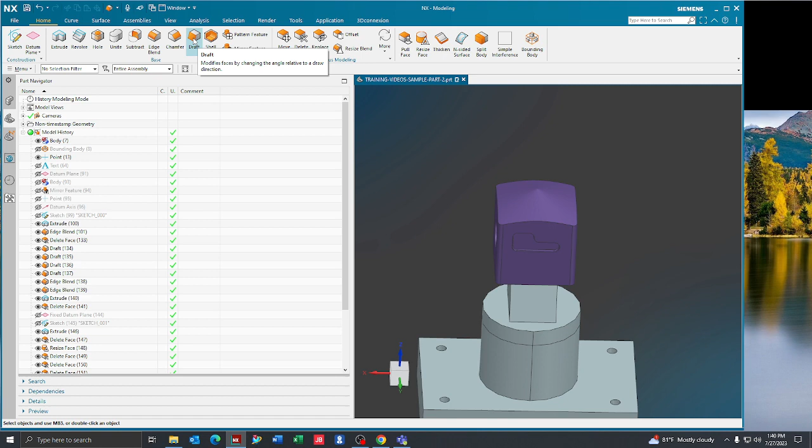Here's how to draft a face in NX. We'll go ahead and go to Application, Modeling, and on our Home tab, you'll see that there's a draft option. If you select this draft option, it's going to open up the draft dialog box.

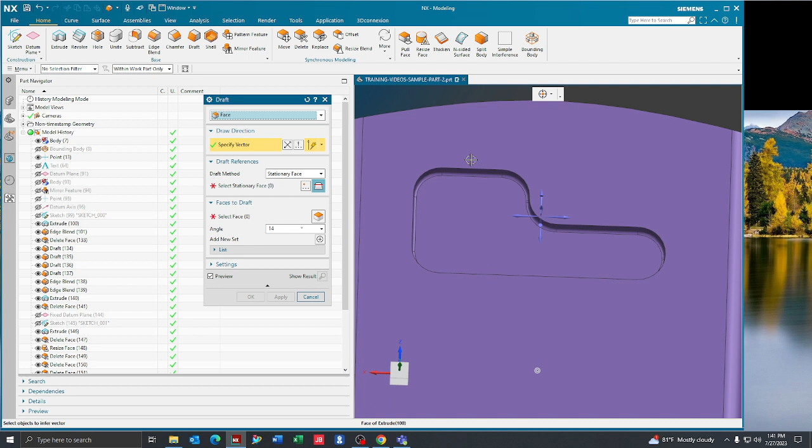Here, we can then decide what faces we want to draft and at what angle. So here, using the face option, this is the one that gives me the best results generally. We can select our vector. We want to draft these faces of the pocket outward or inward, but we want them to be referenced from this direction. So we'll go ahead and select this face or this vector.

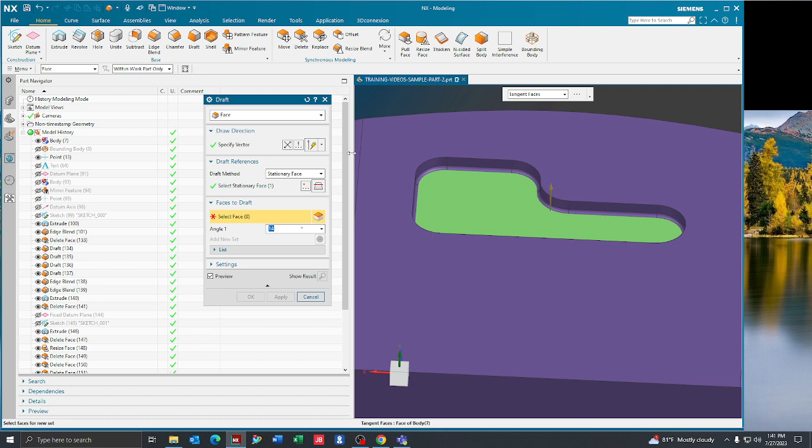For our stationary face, it's exactly what it says. This is the stationary face. We'll select our pocket floor because that is the face we do not want to move. For our faces to draft, these will be the faces that you're trying to draft or taper or angle out. We'll go ahead and select each of these faces singularly.

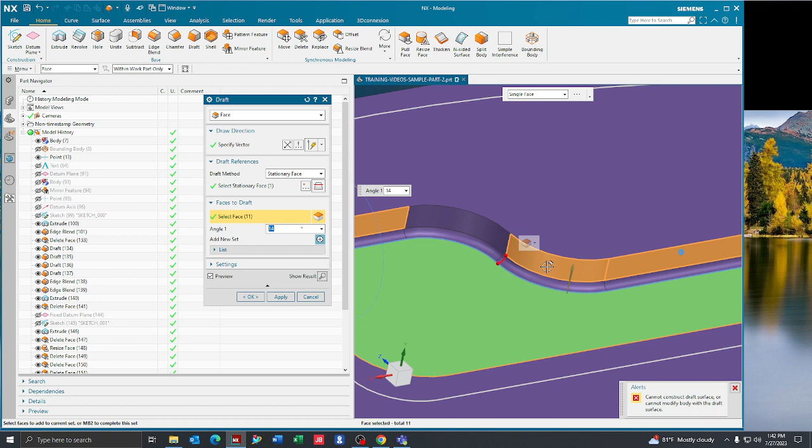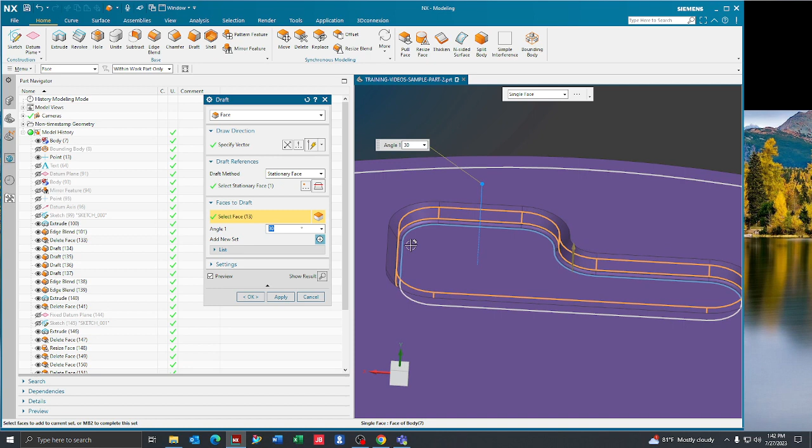And as you see, while I'm clicking on these, it's giving me a preview of what it looks like. All right, so I've selected all of my faces, and you can see the orange line is where the top of the wall was, but at this 14-degree angle that we have here, the wall is kicked out. If I change this to 30, you can see how it's going to taper that wall. And as we do that, it's going to automatically subtract or add to that model based on what you have.

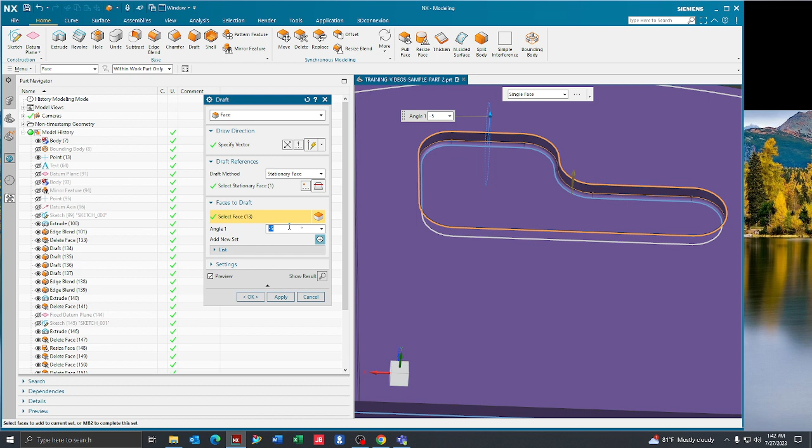So here we have a 30-degree angle, kicking those walls out 30 degrees. Now, if I were to say negative 30, that's too much. NX does not want to do that. Maybe we can go with a negative 5 or a negative 10 for this example. And here you can see that the face now kicks negatively or inward from our original orange top of wall line.

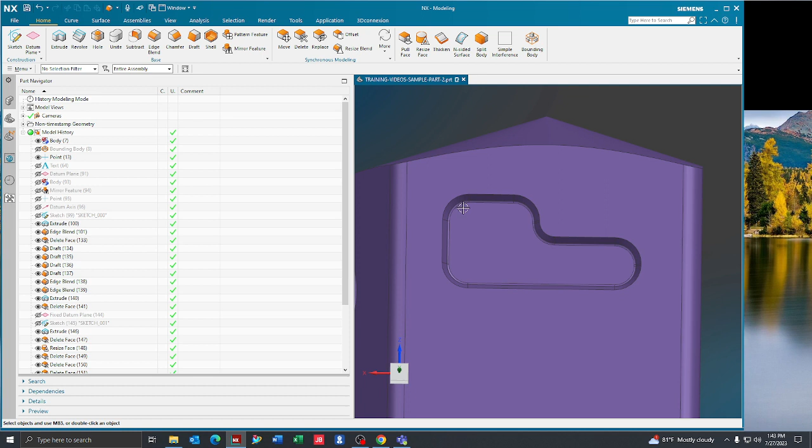We'll go ahead and go back to our positive 30. Then you can just say OK, and now your walls are drafted outward at that angle. If you scroll over to your modeling tree, you'll then see that there's a draft here. So if the angle is incorrect, you can simply double click that and then change your angle here or change your faces or whatever you need to do. It's fully editable.